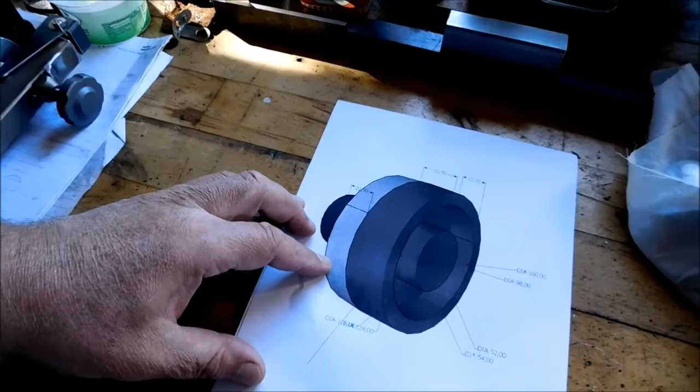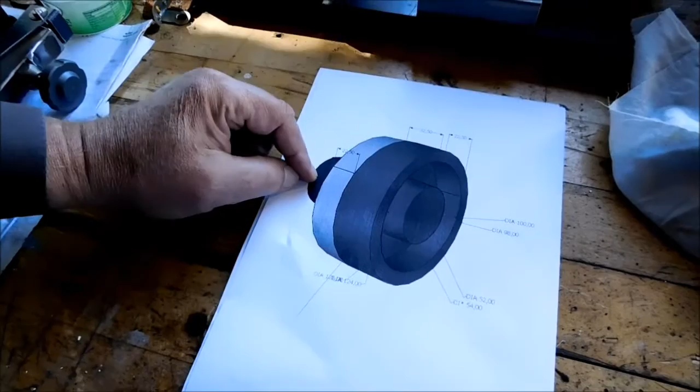And thanks for watching. Today I'm gonna work on my belt sander project, and especially preparing the pattern for the main drive wheel. I've made a drawing here in my SketchUp, and I think I'll make it out of 3 parts. The black one here, one part, the lighter one here, another part, just the rim into this central wall here, and then the back hub here, and it'll be a wide hub because of the distance from the motor. The center of the main wheel has to be a little far away from the motor, so the hub has to be a big one.

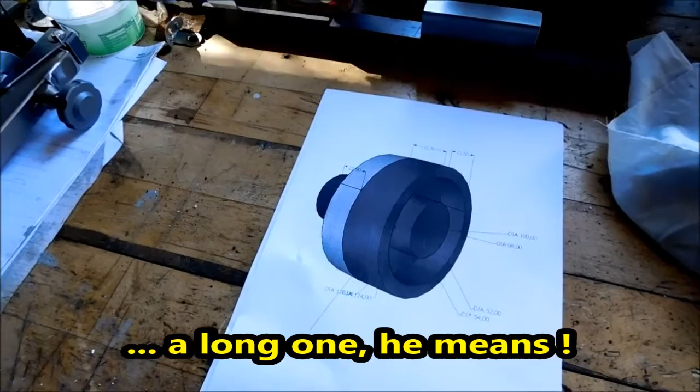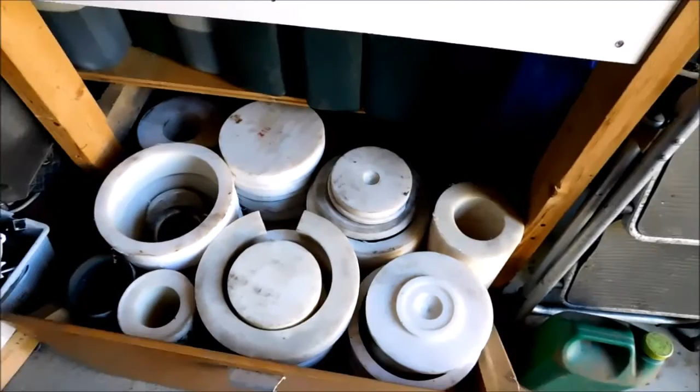And I plan to make the pattern out of some plastic nylon material, and I've got a lot of this stored in my plastic department here. And I have more than that, and it should be a material called Ertalon 6 PLA, and it should be a well suited material for making gears and so on. I have some gears made out of this, and they look very, very nice.

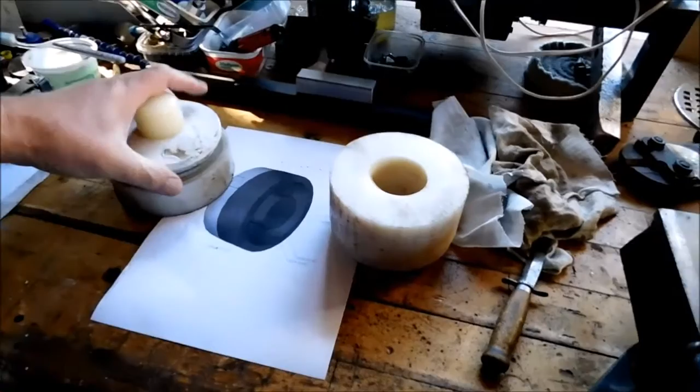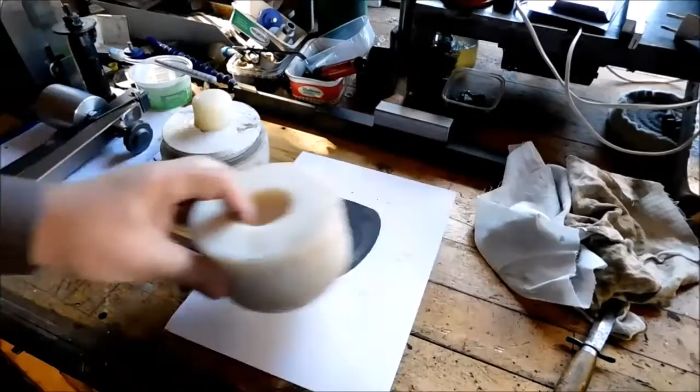So I've found some pieces here I want to use for my pattern, and in the first place I think I'll make the central wall out of this piece here, and then make a rim, 2 rims maybe, and glue them onto this central part here. One of them should be glued on, and then the center hub on the outside here, and a loose rim for the inside here, and then a loose part here. It could be just a pipe, because I'll feed the mold through this pipe too. I think it's called a riser for the mold. So that's it. And of course this is a job for the lathe.

Now I've mounted the center plate here in the chuck, and I plan to face this one side off in the first place. And a little bit of the surface here, so I can hold it when I turn it around.

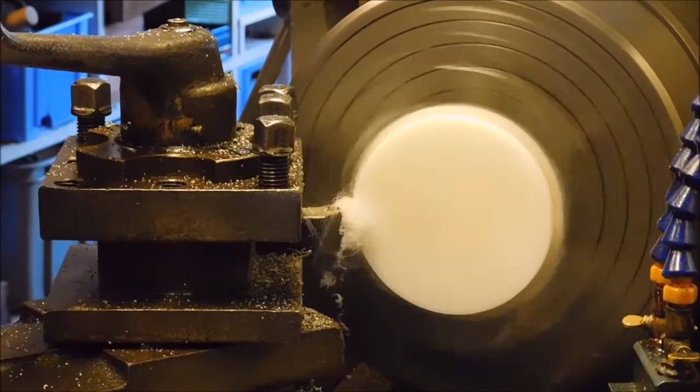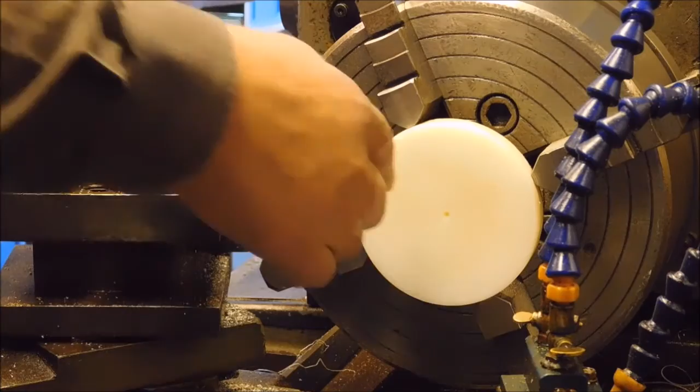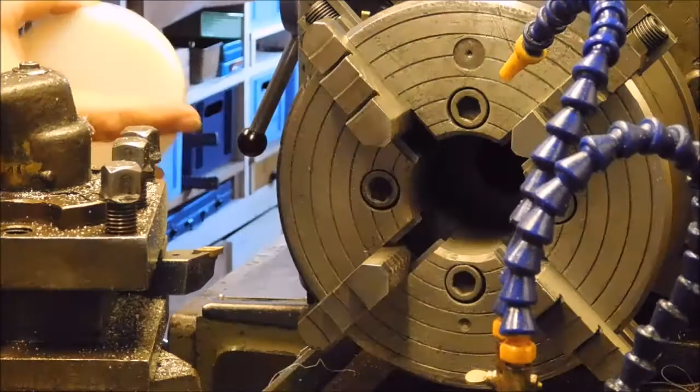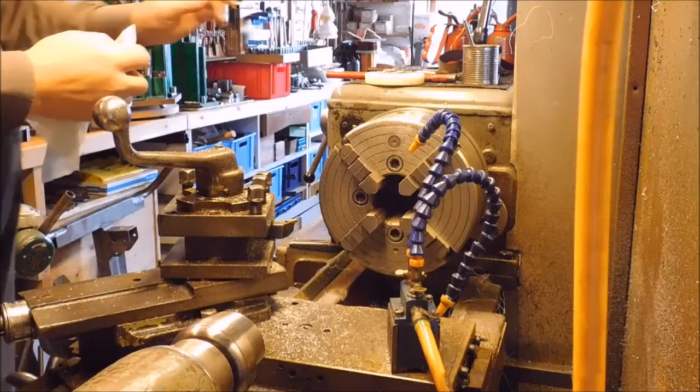I've center drilled it here, and I think I'll try to friction drive it so that I just mount some double-sided tape on these jaws here, and then put it onto there. Then I can turn the outer rim here at the same time. I'll just rinse the tip of these jaws here. And place a small piece of double-sided tape. That's the worst part here, to get the tape off.

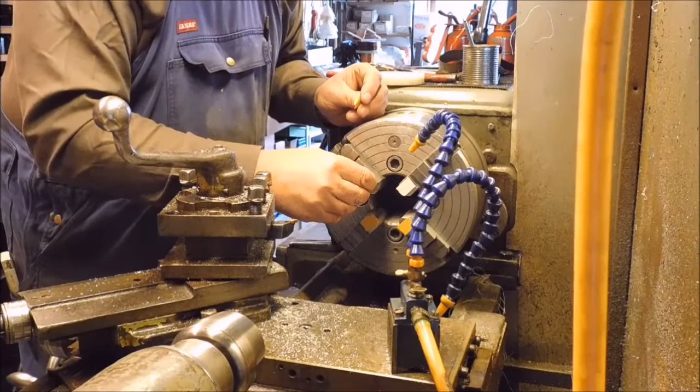You can't see, you can't feel, you can't... Yeah. That's how it is when you get old. It'll come to you someday. Mark my words. Yeah.

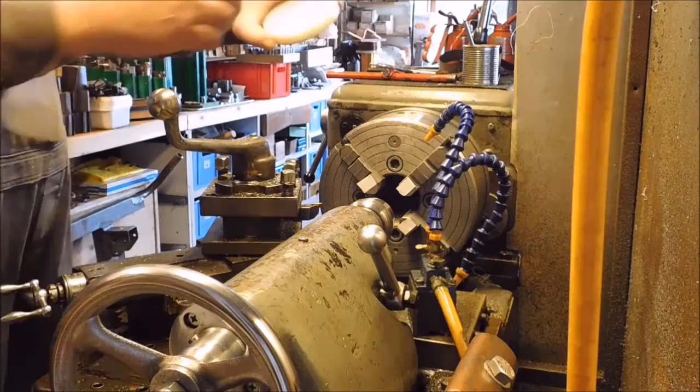And then bring the live center as close as you can. And put the center drill in there on the live center and just press it against the jaws. Yeah. Be sure nothing is colliding. Yeah.

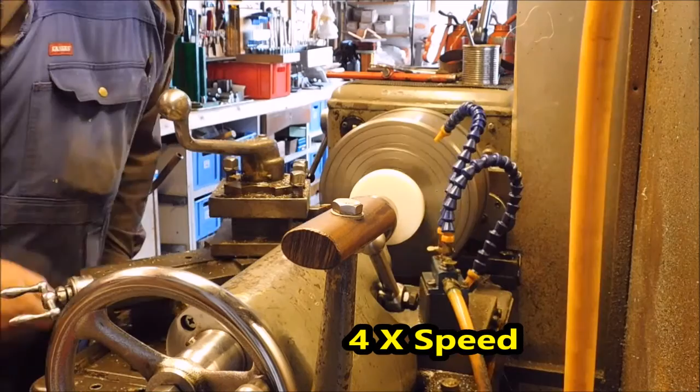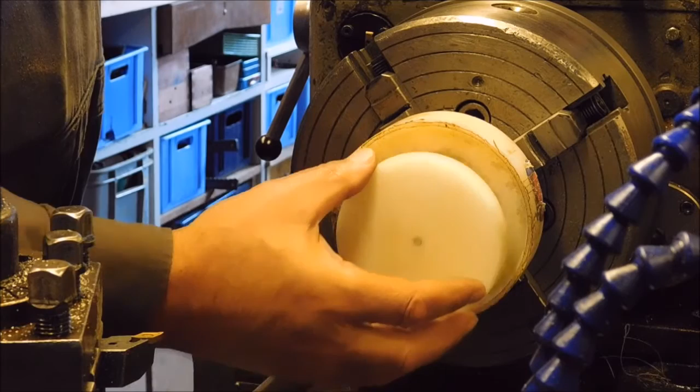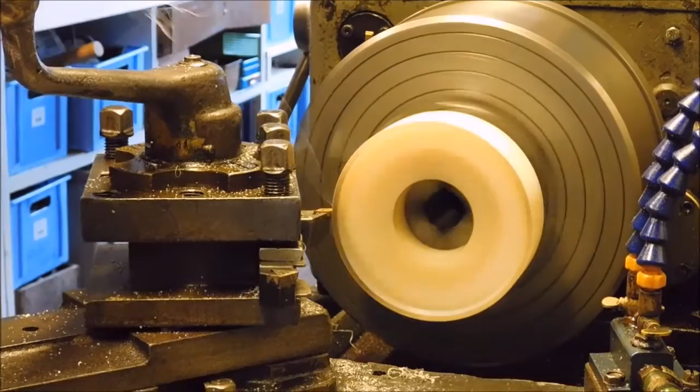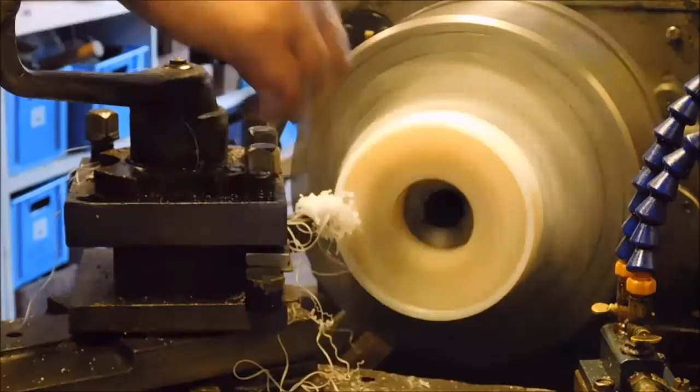Now I've mounted the next part, and I'll make it nice out here, and then face off this so that this can go inside here and then glued together. So I have the main part of the wheel here. Maybe that's not enough. It's a little gummy. I think I'll have to use some very sharp bits.

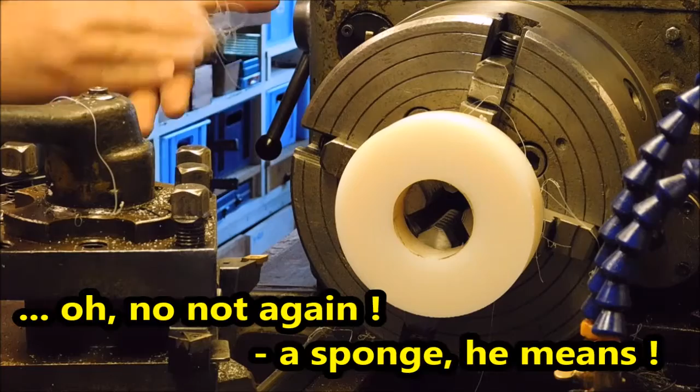When you're a cheap guy, maybe this could be used as a washing, what do you call it? Washing thing. The staff does not agree.

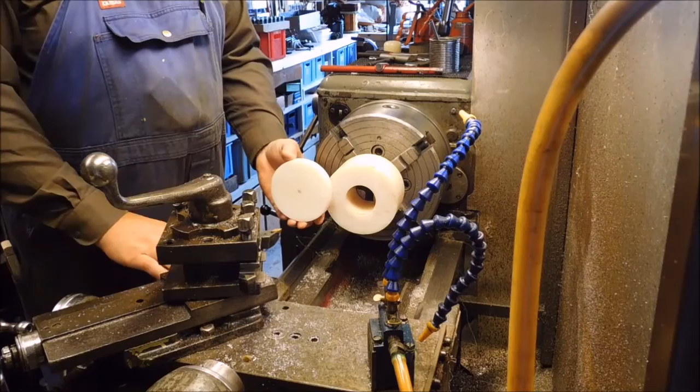In fact, I started on the wrong piece, because this piece here is the rim and the center part will glue together, so that this wall here is aligned with this, and this piece here is a little smaller than this rim here. So I have to do this piece first and then turn this down to the size to fit this one. So I have to start with this one and make it nice, and it has to be 32.5 millimeter in here, and then bore out here so that this can go inside and be glued flush to the face here. Yeah, I'll start with that and zoom you in a little.

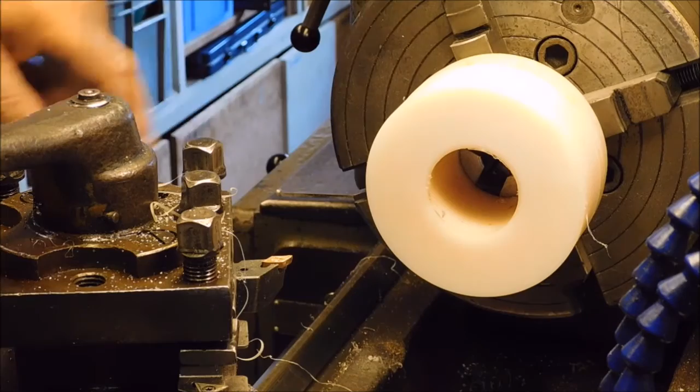Yeah, I believe I have to go a little further, yeah. I missed this part here. Yeah, nice. And then I have to bore it out so that this can be glued into here.

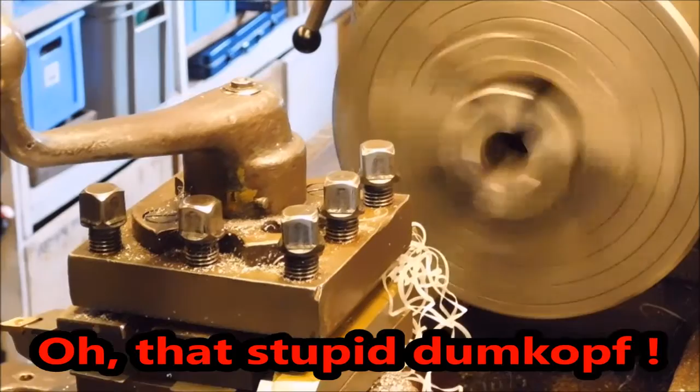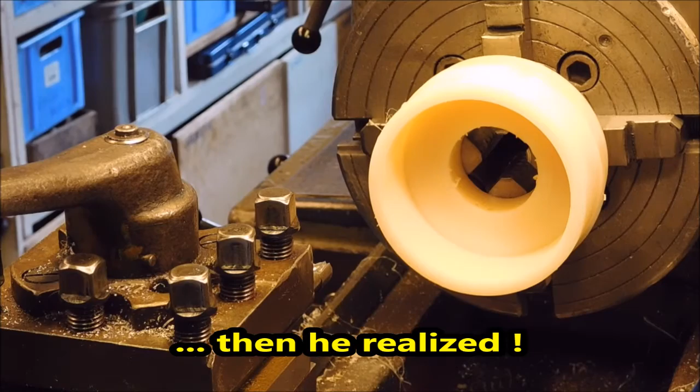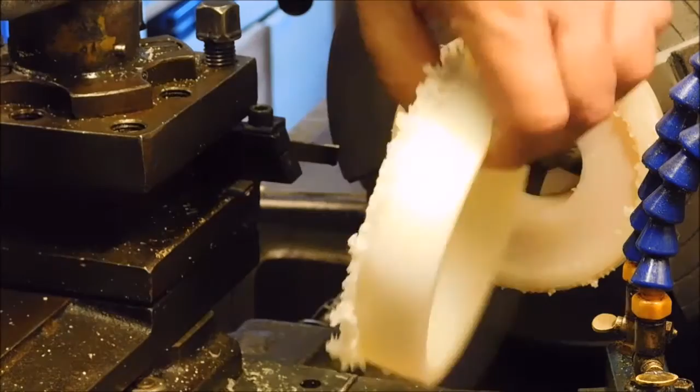Now I make the taper both inside here and outside, and I'm gonna cut it off 33 millimeters from this edge here. I'm afraid I was driving a little too fast there. There's a lot of deburring here. But

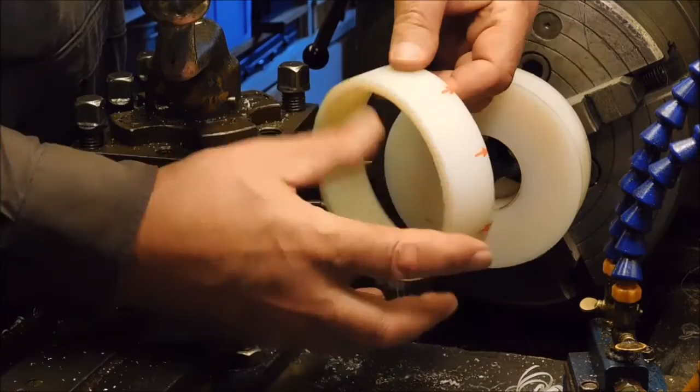now I know that. Now I've mounted the other rim, and I have to make it to fit the size here, the big end. The taper is this way, smaller here, bigger here, and I have to make the outer diameter here to fit this. I'll come back when I've finished.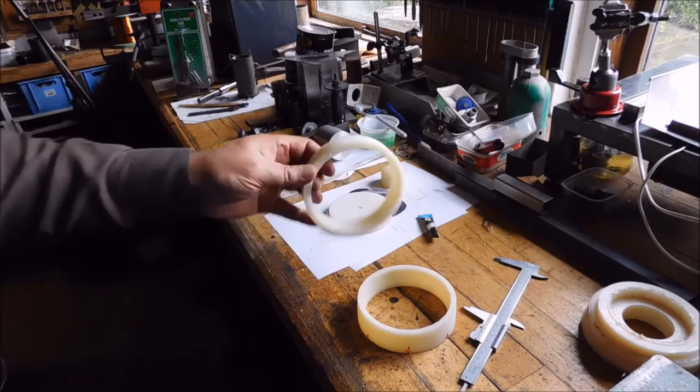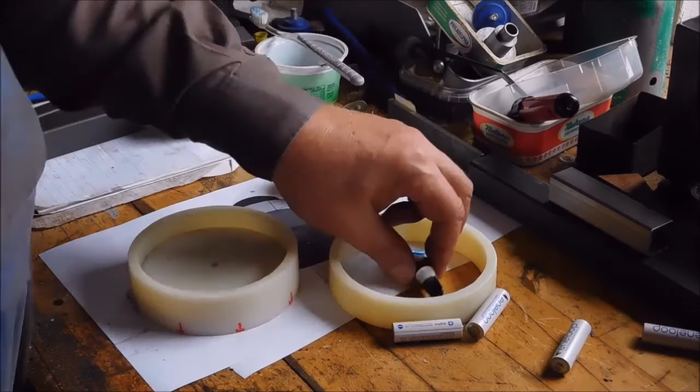It is a little hard to deburr without the right tools, but I only have got this knife here, and it doesn't have to be that accurate. It's only for the molding. I'm a little excited to see if super glue can glue this material here. Ertalon

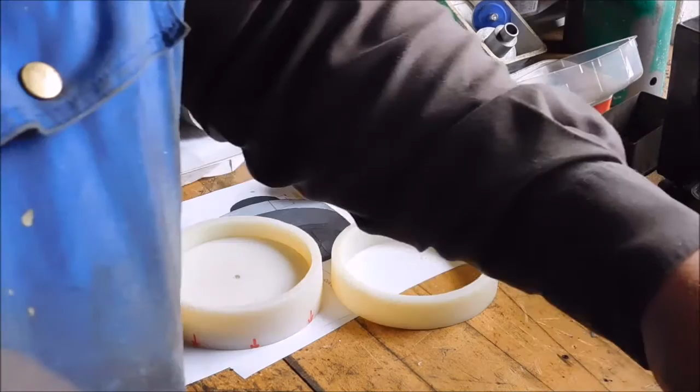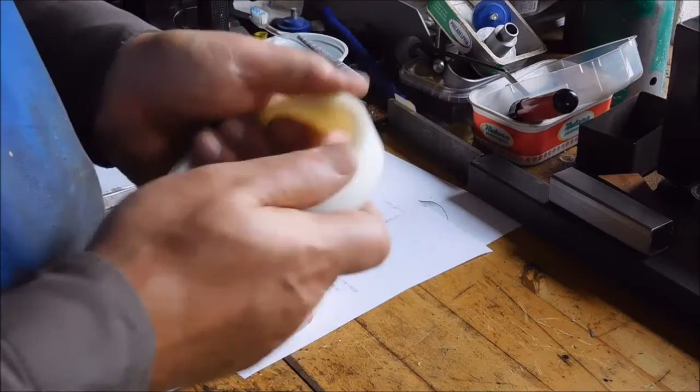6 PLA it's called. When you don't have the right bit for this deburring tool, then I find coarse sandpaper, and loosely doing this can take off these strange burrs there. Yeah. Now this is the loose rim, and I have a split line.

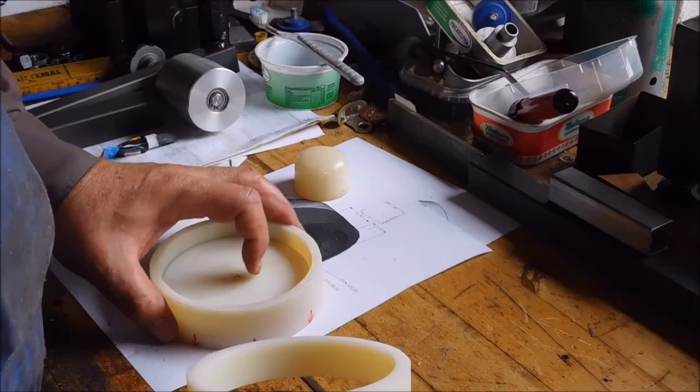When this is glued, then the split line in the molding is here, and this has to go on there. So far away with that one. Then I'll just place it here and take some super glue around the corners there. And the super glue is a very, very nice thing, because when you first time have taken this tip off here, then super glue can glue everything, including the tip to this.

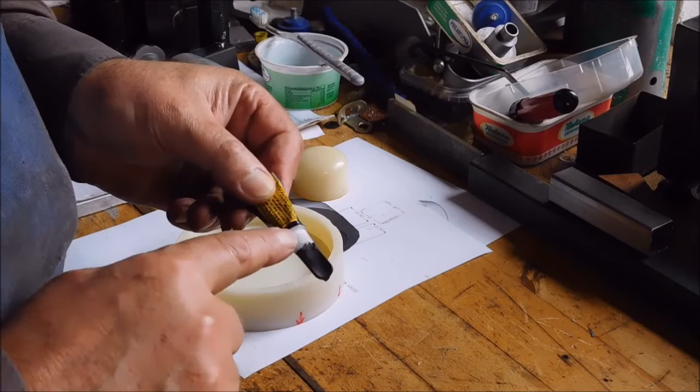So the next time you have to do it, you can't get it off without destroying both you and... maybe a little hot water would do it. But, I'm excited to see if it'll hold.

And then this one here is the outer hub. Placed here, and then no more. The machining marks, I can align it. I would have liked to glue it on the other side too, but I don't dare to take it up. Not right now.

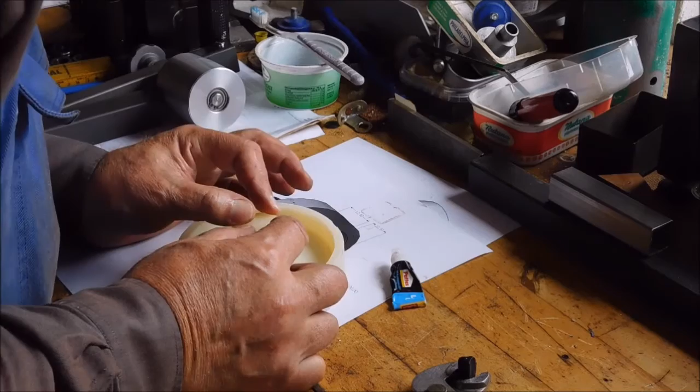And I still have this in the center. Yes. I think that's a nice method to use for patterns when they are rounded like this. Just to make them out of plastic. You don't need to paint them, you don't need to do anything with them. I don't think so, anyway.

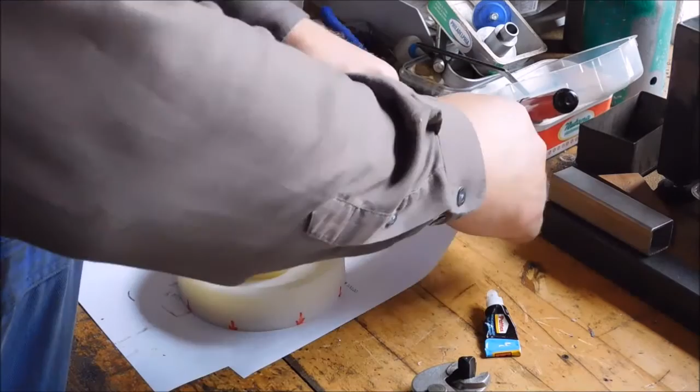And the other side of the hub will be just a pipe I'll use to pour the mold with metal, melted metal. I think that'll do it. Remember, no glue on this one here. Now I'll prepare it for casting. For this I have to make a little jig here.

For this is my bucket with sand, and I'll just have to turn it around a few times to add some more water. And I don't really need to have one with the motor on, so I'll just turn it by hand. But I think I'll have this little stand to hold it while I'm doing it. It is a little heavy, so that's the next project.